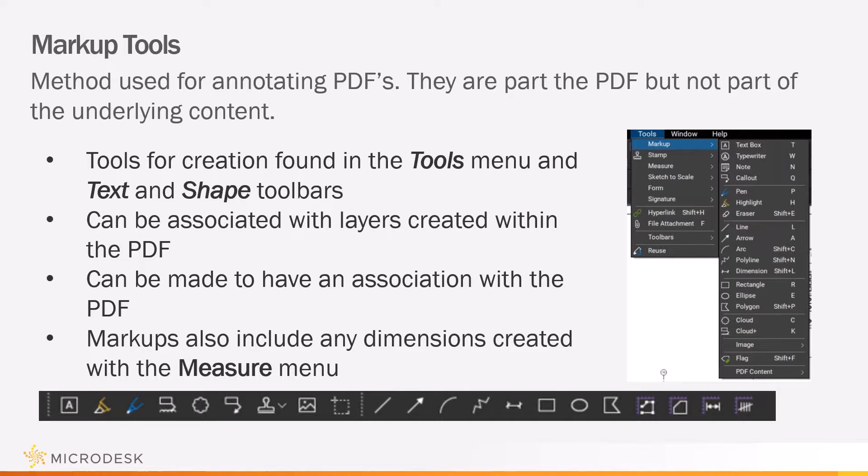Markups can be locked to protect them from editing in a couple of ways. One of those ways is the flattening tool. In Revu, flattening involves moving markups from the PDF's annotation layer to the content layer, in effect, making them part of the PDF. PDFs do not need to be opened when the flattening process is run, which is particularly useful when flattening markups on multiple PDFs.

If the PDF is open when the markups are flattened, a manual save is needed to complete the process. Whereas if the PDFs are closed and added through the Flatten Markups dialog box, the document is automatically saved upon completion.

Markup appearances and other aspects of them can be manipulated by working within the markup properties. These properties can be seen using toolbars such as the Properties toolbar, Appearance toolbar, Font, Line Style, or others. Those and other aspects of the markups can also be manipulated using the Properties panel. Here within the Properties panel, you will find a list of the properties that will be available to you in the Properties toolbar, but also much, much more that will help you with customization.

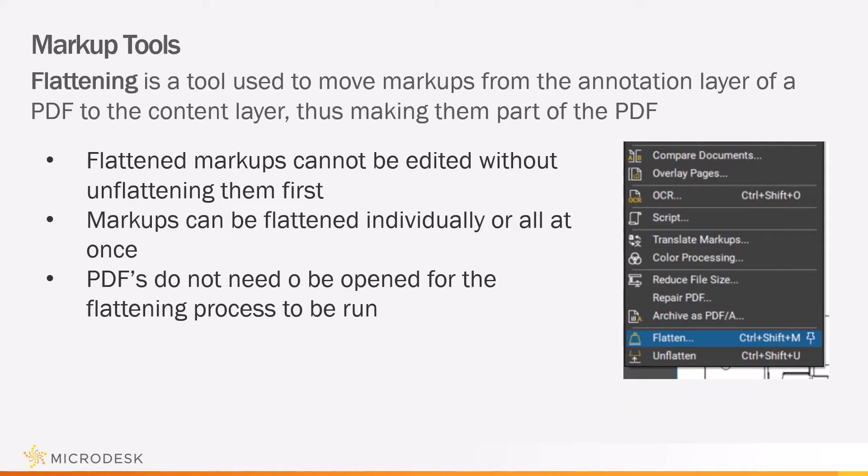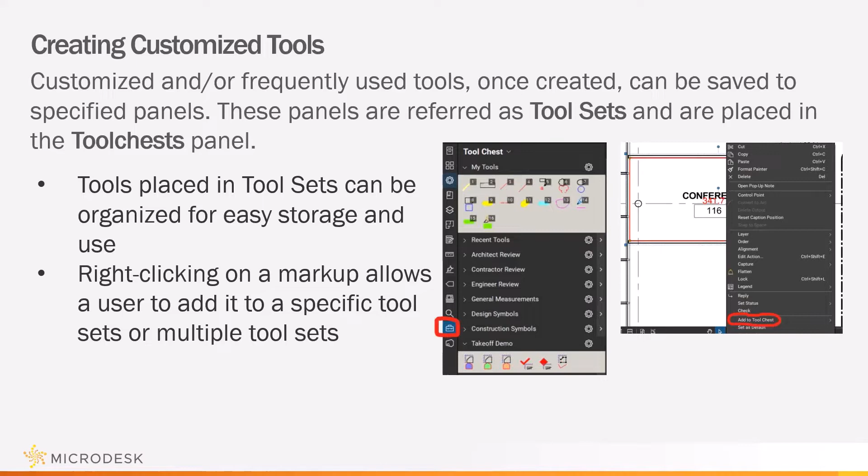When you customize tools, you're able to place them in the tool chest. The tool chest makes marking up documents much more efficient by storing and organizing frequently used markups for easy use and reuse. It automatically remembers recently used markups, can reapply a markup in its entirety or just using its properties, and automatically scale tools to fit different drawings without having to recreate the tool to match the drawing scale.

Once tool sets are created, they can be saved for a single user within their profile or saved out to a network location for use by many. Tool sets can be exported by selecting the gear icon next to the tool set name. Tool sets can be imported via the Manage Tool Sets option in the tool chest pull-down menu.

This will allow you to make this an enterprise level tool because one person can create the tool sets and place them in the tool chest and then save that out, and other users can then go to that network location and import that in, and then everybody within the organization or different departments within the organization will have access to the very same markups.

The tool chest makes marking up documents much more efficient by storing and organizing frequently used markups. Once the tool sets are used, legends can be created from them, which will allow us to place those legends onto the actual documents. So when the markups are there, people will have instant recognition of what those markups stand for.

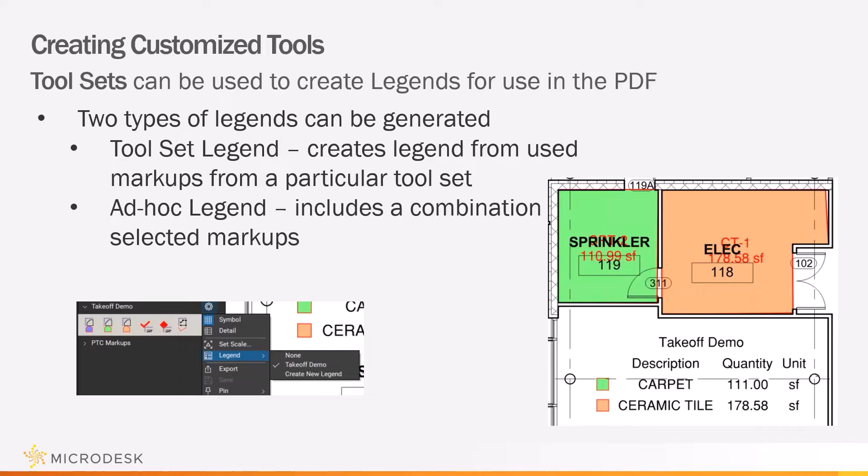Markup tools in the tool chest can also be displayed in different modes. Those two modes are properties mode and drawing mode. Right-clicking on the tool will display one of those modes. The properties mode adds new markup with the same appearance properties as the saved markup. In this mode, the properties are retained, but the exact dimensions, text, and so on are not.

In the example that you'll see as we go forward, using the tool properties would create a new box if we were creating the area. And it would create a box giving you the correct area of this new spot, but using the properties of the saved area calculation markup, which we'll demonstrate. The text inside of that box would represent the real-time value of the new area where that markup was placed.

Drawing mode adds a new markup that is the exact duplicate of the saved markup. It will be as if you copy and pasted the original markup rather than made a new one of a similar type. And what you will see when we demonstrate this is that when you right-click on the actual tool in the tool set, it'll allow you to toggle between the two.

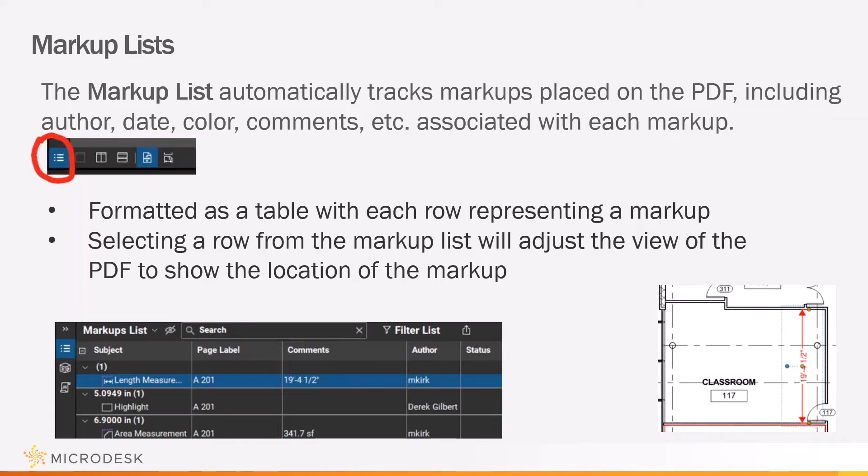The data displayed in the markups list is customizable. Users have control over which columns are shown and in what order, and create custom columns, including columns that perform user-defined calculations. 6 types of columns are supported, and you may add as many of each type as desired. And those choices for those columns are check marks, choices, dates, formulas, numbers, and text.

Once those markups are there, what one may want to do is send this markup list out for distribution to other stakeholders on the project, as well as internally to kind of show where things are within the project and within the status of the markups. This can be done with a markup summary.

And that markup summary is a way to publish a report of all the markups in the PDF file, including any embedded images. This summary can be sent to a printer, a CSV file, or an XML file that can be opened in Excel or other third-party programs, or appended to the end of a PDF. A summary differs from exporting markups because the data contained in the summary is formatted so that it can be read by other programs.

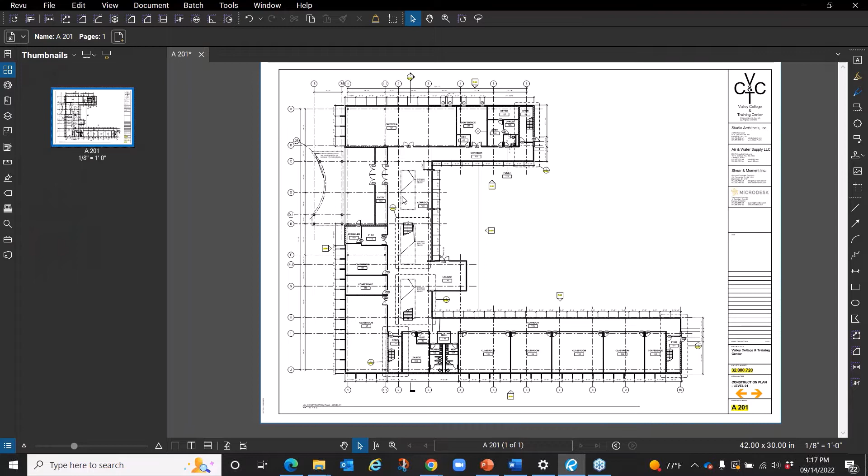So what you see here within our Bluebeam software is I have a sheet open, and one of the markups that you'll see that is set up here already is what's called, if I go to my tools, a hyperlink. So what the hyperlink tool will allow us to do is set up a sheet so that it will send us to a specific window in another drawing or another drawing as a whole, depending on how we set it up. So I can go to a hyperlink,

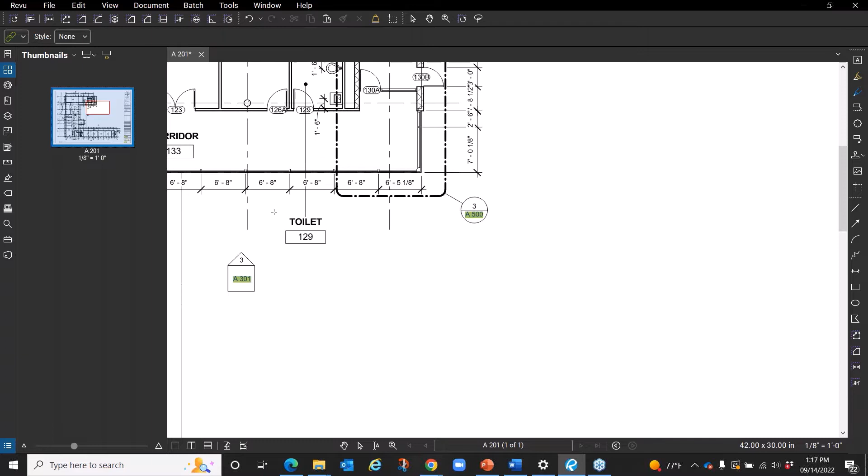and it's going to ask me to set up a window around where I want that hyperlink to place. And now it's asking me to jump to a page, a place. And if I say I want to jump to a place, then it will let me create that place. And I will get a rectangle here. And what I say is, when I click on this room, I want you to actually jump to this room area. And it gives me the coordinates, and I select OK.

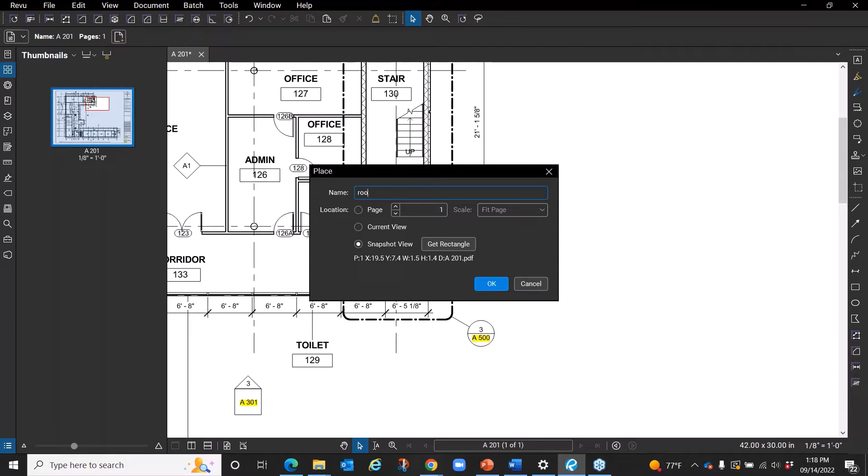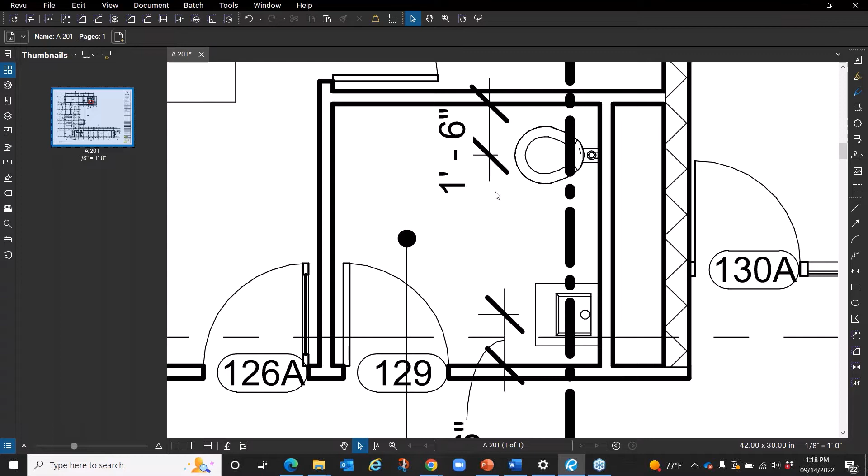And I give it the name, and I will call it room 129. And I select OK. That tells me what I have, and I select OK again, and then that's the snapshot that's there. And when I select it, you see that it automatically jumps me to that room. That is a form of a markup. Now, that form of a markup is done for navigational purposes.

But we also have markups here that can be done for notation. I can choose a markup that say, if there are red lines within this PDF that I need to keep up with, I can use a highlighter to say, I've done this markup. That becomes a markup. So whatever revisions needed to happen in that area, I'm just signifying that I've completed them. That could be that markup.

We also have markups where text boxes, if I want to say that in this area, I'm going to draw a text box. In this area, I wanted to say that this should be non-slip flooring in this area. And that becomes a text box for me. And adjust that text box.

And then now I can add arrows. And each one of these becomes its own markup. I'm going to create that markup and delete this one and delete the other one. Or I can create the markup where all that is linked together by choosing a callout. And then that becomes a consolidated markup. So these are all markups.

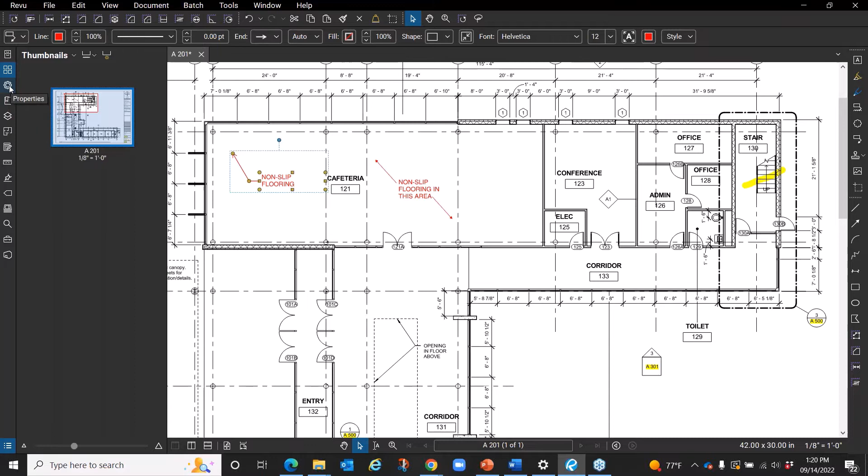If I select this markup, I can go over to my panels, and I have a properties panel here that gives me all the information about that particular markup. And I can change it. So if I want to select, come in here and then change that, this should be a different color. Come down to my font, and I want my font to be that same color. So I can change the color of that information within the markup by just selecting the markup and going over to the properties panel.

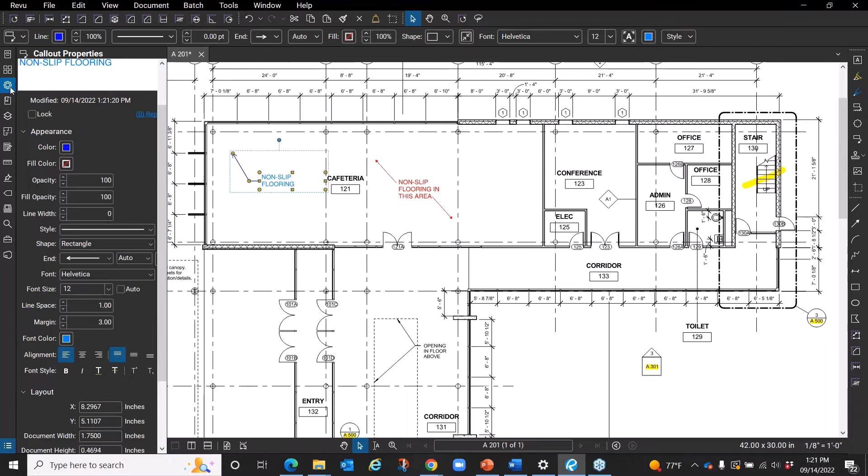Another set of markups that we don't really see here in these toolbars, because they have their own toolbars, are the measurement markups. You'll see those same things if I come to tools. I got my markup list here, but then if I go down a little bit further under tools, I have my measure tools, but they are still creating markups.

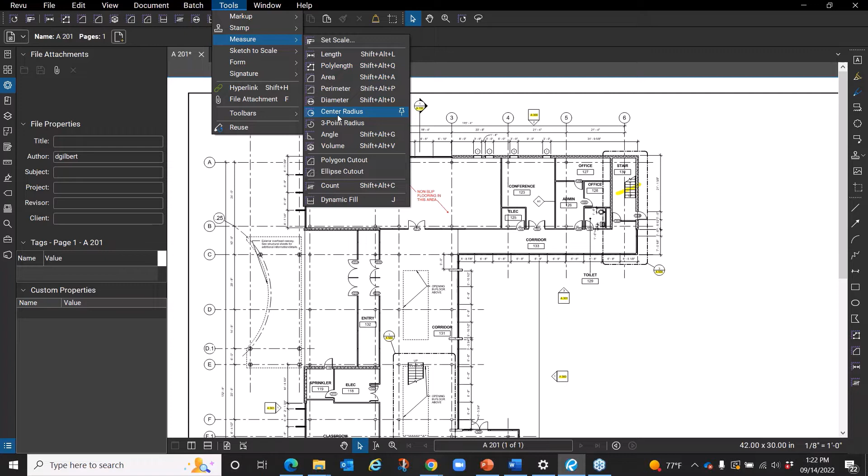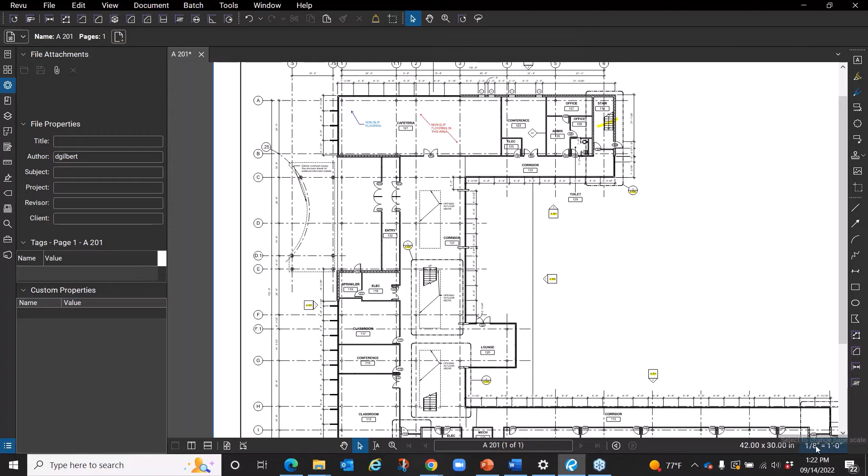If I wanted to create those, the one thing that I want to do before I begin creating any kind of dimensional markups is I want to make sure that there is a scale assigned to either the sheet as a whole or an area of that sheet. In this case, there is, but if there wasn't, this would say no scale set, and then I would left click on this field, and I can either set it by using one of my presets, or going through and calling it custom, in which I can calibrate that scale.

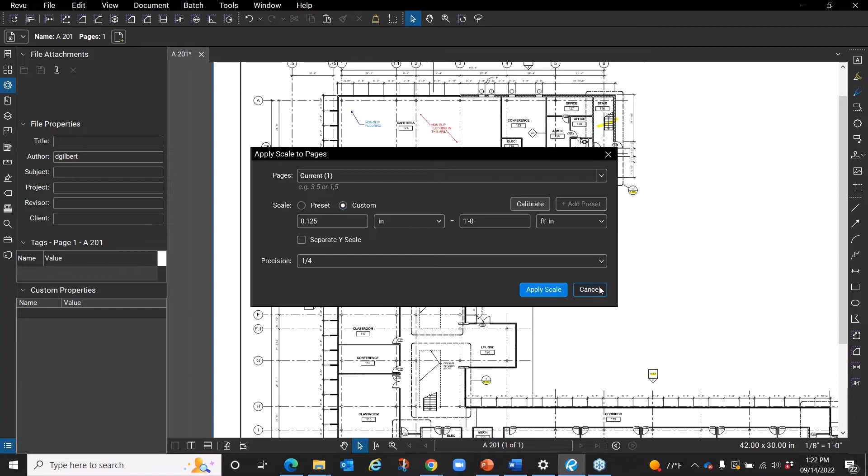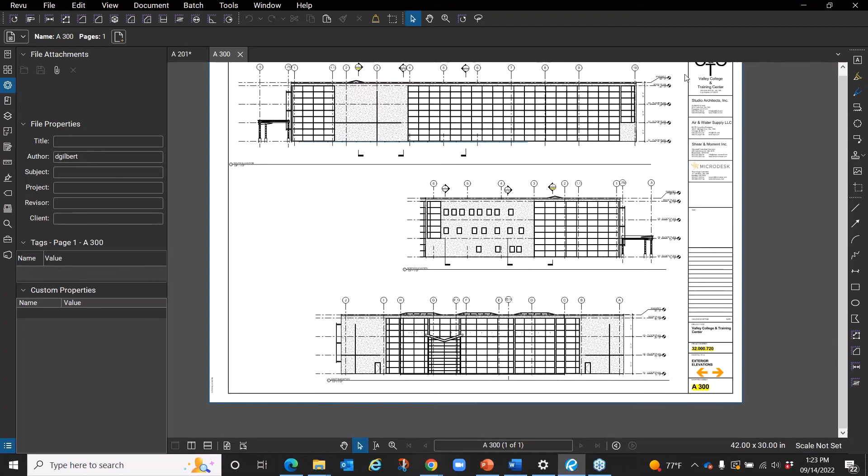If I have a dimension here that this is 12 feet. So let's say this is not set and I want to set it. I'm going to left click on it. This is where it says scale not set. I'm going to call it custom so I can calibrate. And it's asking me to pick 2 points. I pick those 2 points and I tell it that's the dimension that it is. Recalibrate.

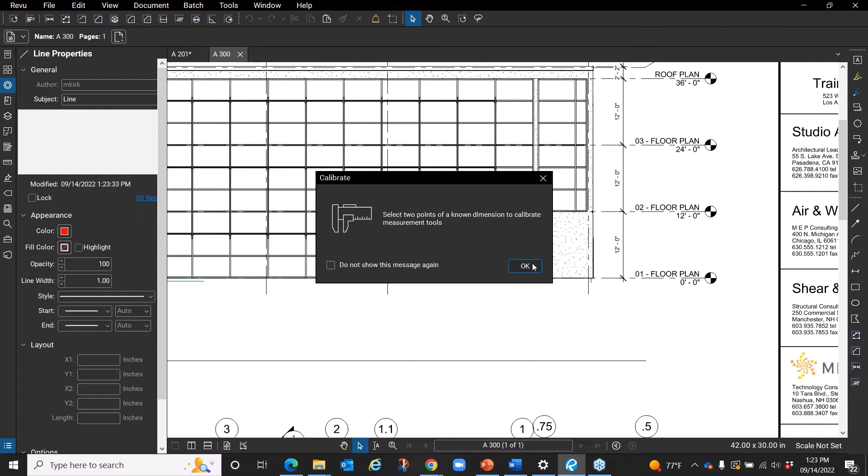And it tells me that this dimension is 12 feet. The 2 points that I picked should equal 12 feet based on that. And I apply the scale. Now I can do a markup. And my markup that I'm going to choose is my length markup. And I'm just going to pick 2 points. And you see that's calibrated and that's set up, giving me the right dimension.

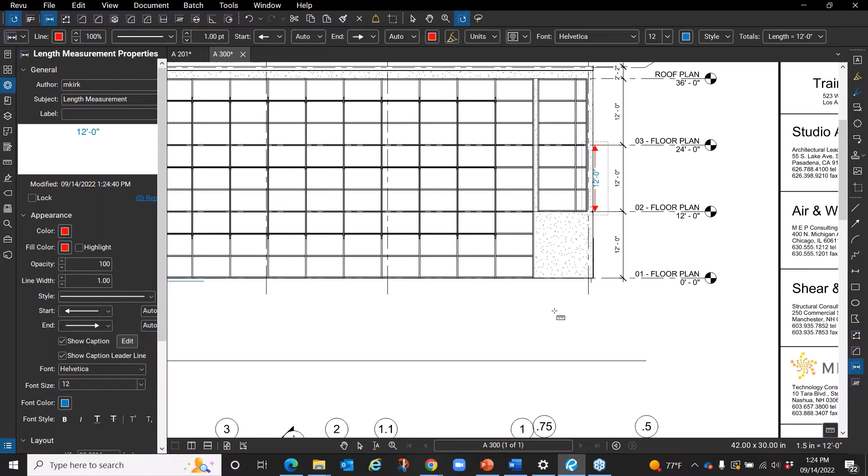In my properties palette, there are my dimensions. That's my dimension. Here are the properties of that dimension. And then I can go through and change any of the properties that I want within that particular markup. So that's how specific we can get with that, with the properties of it.

Now, each of these tools that we've created, if I want to reuse them, then I would want to take the tool, the markup, and place it on a tool chest. What you're looking at here is the default tool chest, or most of these are default within Bluebeam. All depending on what profile you choose is going to be what tool sets you get by default, but you can feel free to add your own.

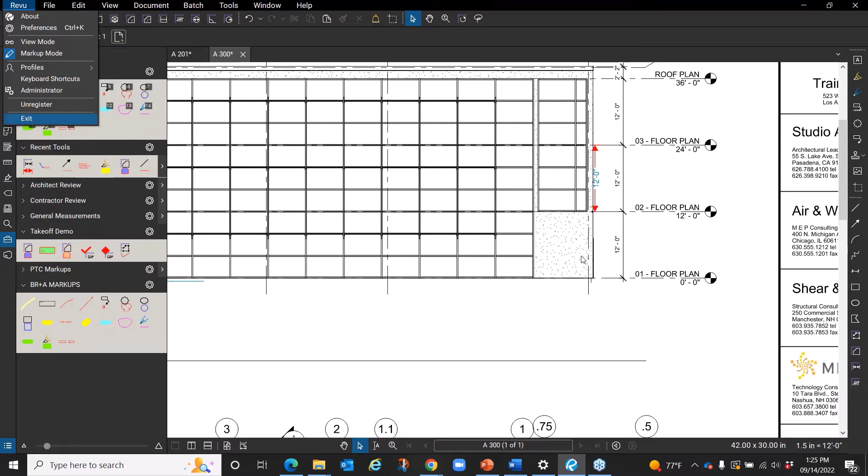I'm going to go back to the floor plan here, because if what I wanted to do is use one of the tools that I have here and place it on the tool set, I can left click on it and then right click to get to the properties and add it to a tool chest. And it gives me a list of what tool chest do I want to add it to. And I'm just going to add it to my tools, and you see it appears there as the 18th tool on that tool chest. If I want to use it again, then I just left click here, and there's my markup.

The other thing with the markups is that if we were going back to the measurement tool, and what I wanted to do was take an area based off of what we've already done before, and I place the tool in the tool chest. If I right click on this, it says drawing mode. And as I mentioned before, drawing mode is an exact copy of the tool. What this toggle does, if I toggle, this is showing me what it isn't. So the fact that it's showing me I can toggle to drawing mode is letting me know that this particular tool is in properties mode already.

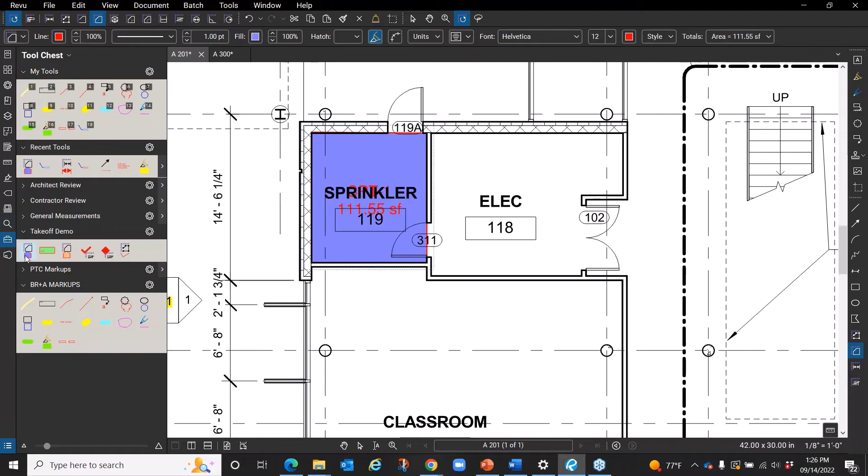So if I want to use it, I just left click on it. It takes me to the area tool, and I'm just going to select the area here, snapping to those points. Hit enter. It's carrying the same properties as this tool was, but acclimating itself to the actual space that I wanted to calculate the area for. Same thing would apply if I did it here. The room is a little differently shaped, snapping to my corners, hit enter, same thing applies.

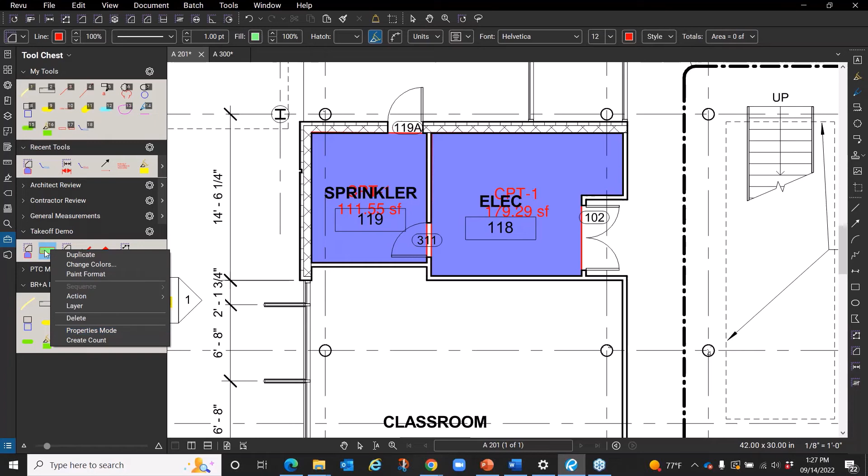Now, if I go to the markup next to it and right click on it, you see it's telling me I can toggle the properties mode because it is currently in drawing mode. So if I use this tool, you'll see what it gives me, the exact shape of the first time that this tool was placed onto the tool chest. So that's the difference between properties mode and drawing mode when it comes to creating your tool chest, your tool set objects that have to do with measuring tools.

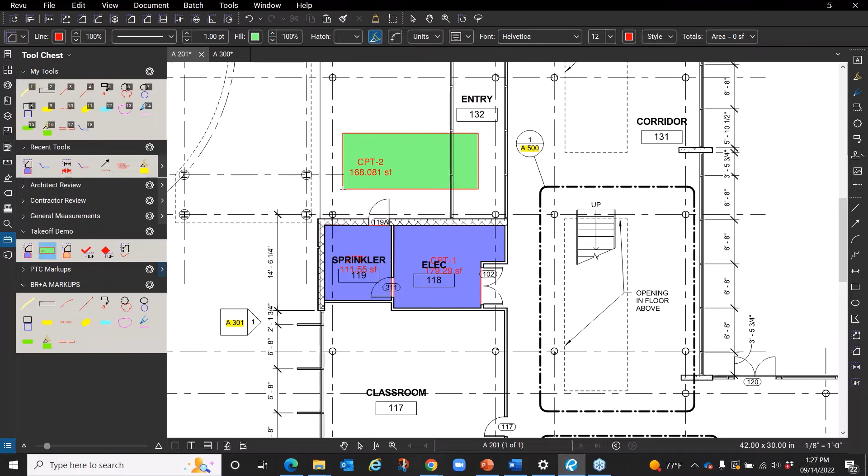But once all of these are done, and I place these on my tool chest, within my tool chest, I can then say, well, I need to create a legend based off of the tool set markups that I've used so far. So I'll create a new legend, and these are the markups that we've used within this so far.

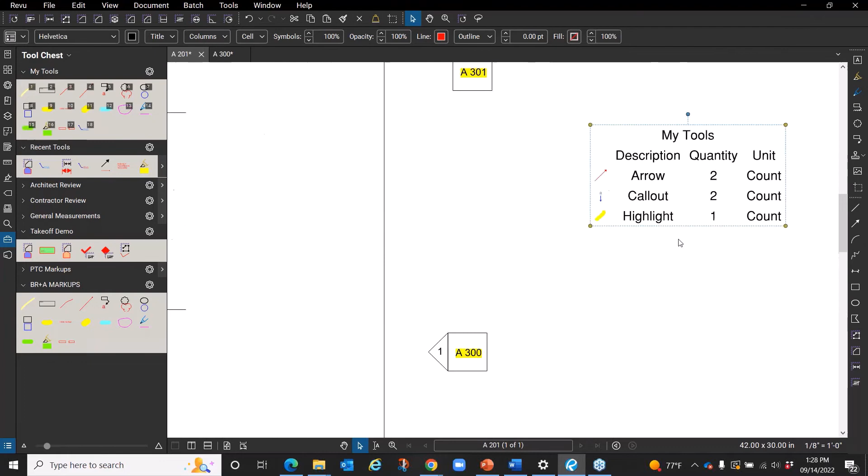If I did the same thing here, create a markup based off of this takeoff menu and create a legend, then it shows me the carpeting that I just placed in. Those are some of the easy ways that you can take advantage of the markup tools and how easy they are to implement within your organization. I have my toolbars. I have my pull-down menus to gain access to those markups. And I have places to keep them and standardize them once I begin the usage.

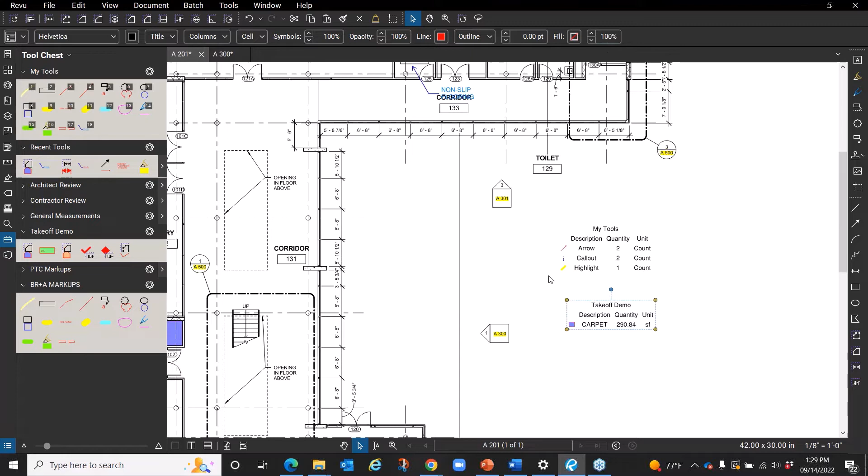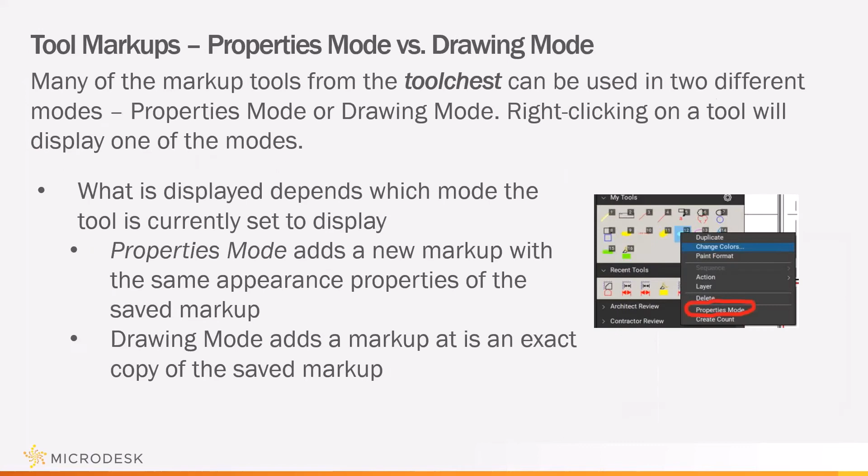So with that, I'm going to jump back into the PowerPoint slide, and if anyone has any questions, we can look at them. So we have a question that I think is referring to the downloading of tool sets for your tool chest, and those are going to be available to you from Bluebeam support.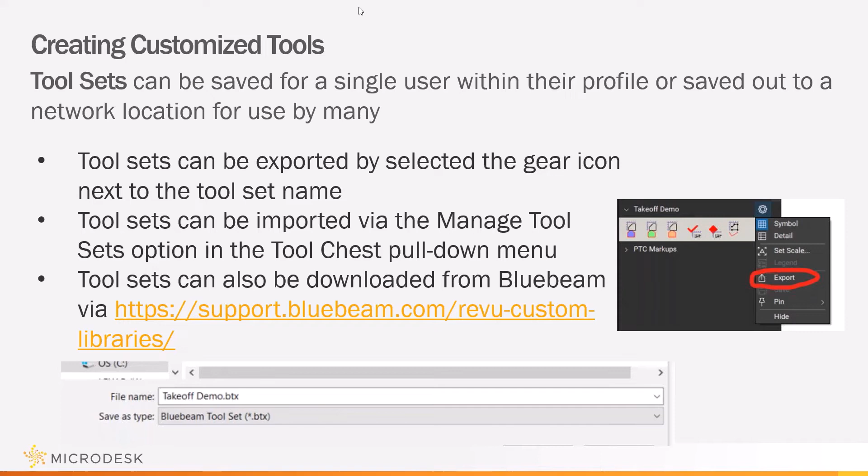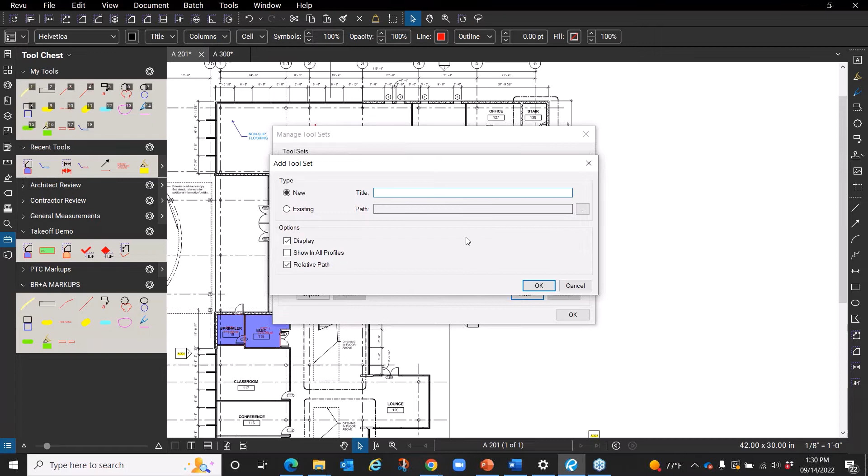So we have another question. How do you create and name a new tool set? I'm going to end this slideshow and go back into Bluebeam to show you that. So what I can do is I can go up to the tool chest title and choose Manage Tool Sets. This will allow me to add a new tool set, but also control what tool sets are currently available to me. Which of those do I want to see? So if I want to add a new one, I can just click add here, give it a new name, and then it'll create a tool set that I can then populate with items.

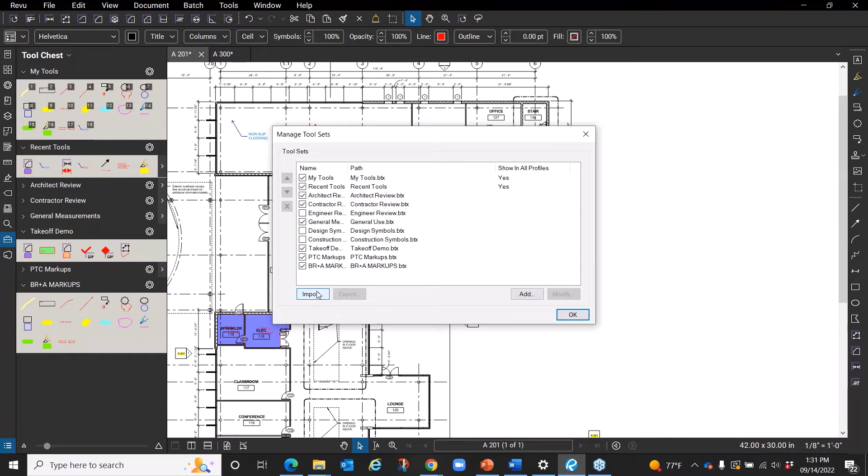Or, as I mentioned before, we can take this to a bit of a higher organizational level, where someone can create the tool set and then save that tool set, export that tool set out. I'm going to cancel here just to jump back into it for a second, but take the tool set and export it out. And then when I come back to manage tool sets, I can import it in if someone created it, and this is something that we want to use on an organizational level.

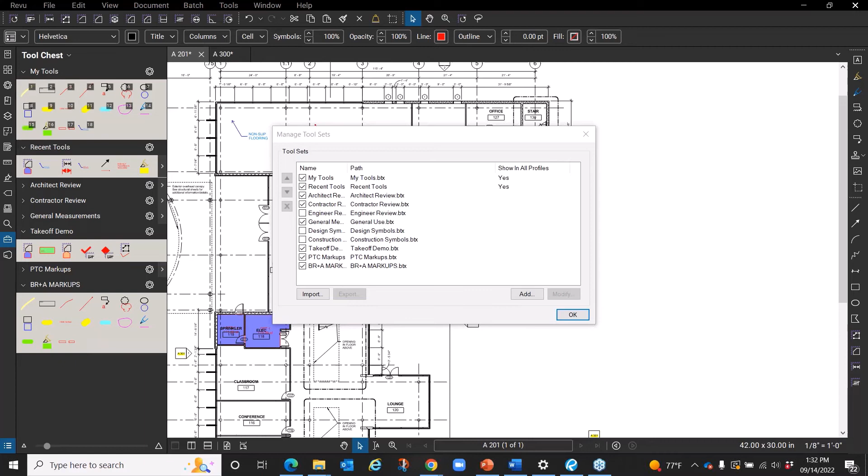So here we have a question of, can you have two different scales on a single sheet? Yes, you can. And this is how you can do it. I'm going to hit OK here to get out of this. I'm going to open up another sheet. Because let's say we have a situation where I have details. Let's see if this is good. Right. Okay. So here we have 1 inch equals a foot and 1/4 inch equals a foot.

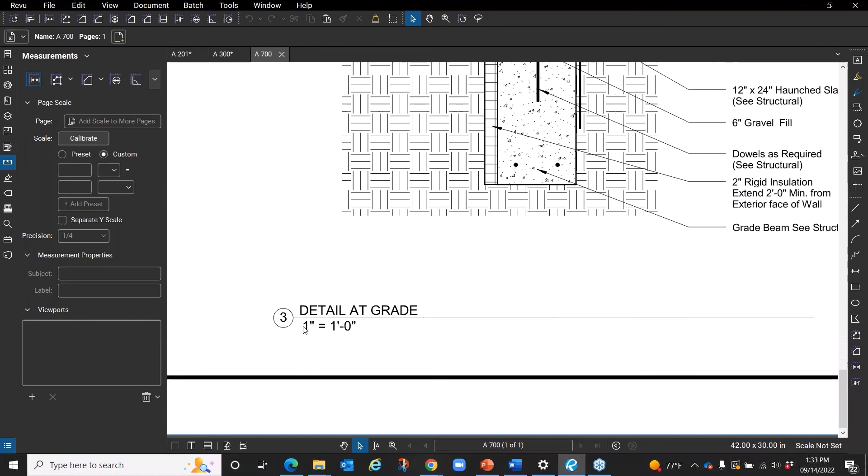And if my intent is to create markups in both of those areas, what I can do is under my measure panel, I can set the scale of two different areas by creating viewports. I'm going to call this viewport just the detail name, detail at grade and roof detail. So I hit the plus sign here. And again, reiterating, go to my measurements panel, down to the viewports, click to add a viewport. I select the region to define the viewport with the window, give the viewport a name.

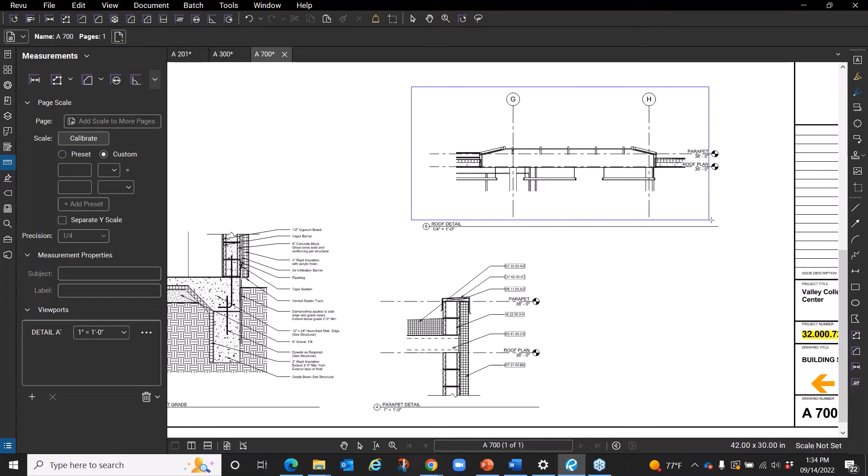It's preset, it's 1 inch equals a foot. What's the precision of the dimensions that I'm going to put in this area? I'm going to say it's 1/8 of an inch. And I can hit apply. That's one viewport. And you see it has the scale noted here. I'm going to go to another area and do the same thing. Create it. Select the two points that are going to serve as the region. Call this roof detail.

That one was set at 1/4 inch. I'm going to leave that. Same thing applies. I'm going to make this precision at 1/8 of an inch. Hit apply. And now you see we have two different areas. So we can assign viewports. We just have to block off the area where the viewport is going to be shown. And then we can assign two different scales.

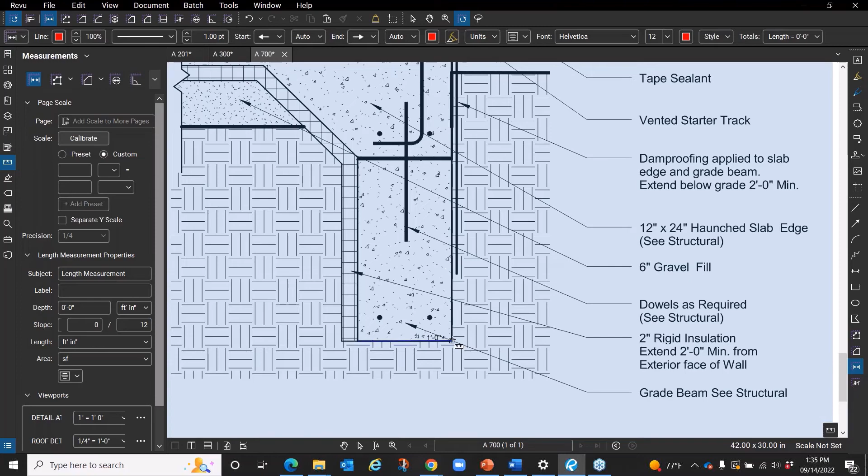So now whenever I go in and I do the length tool, I know that this is the right dimension based on that scale of that region. And when I come back up and do the length tool here, I know that's the right scale for that region.

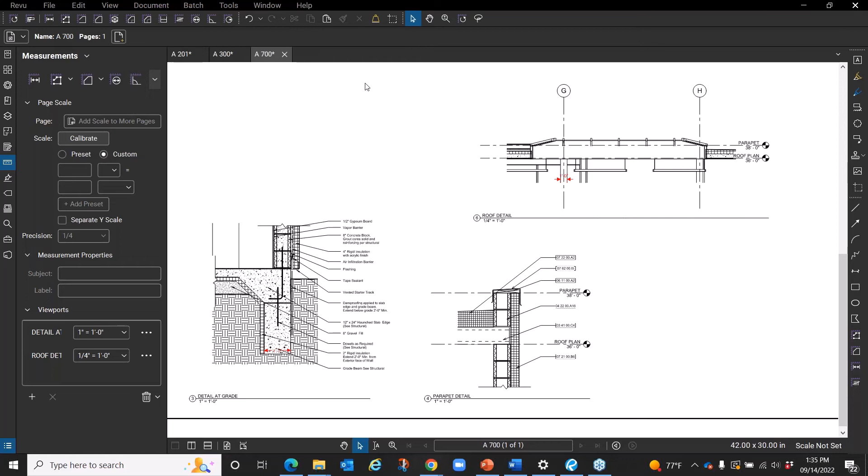So our question is, how do we export organized markups? So if I go to my markups list, and we have a list of our markups here, I can export a summary. And I just choose, in this case, because you want to open it in Excel, the CSV file.

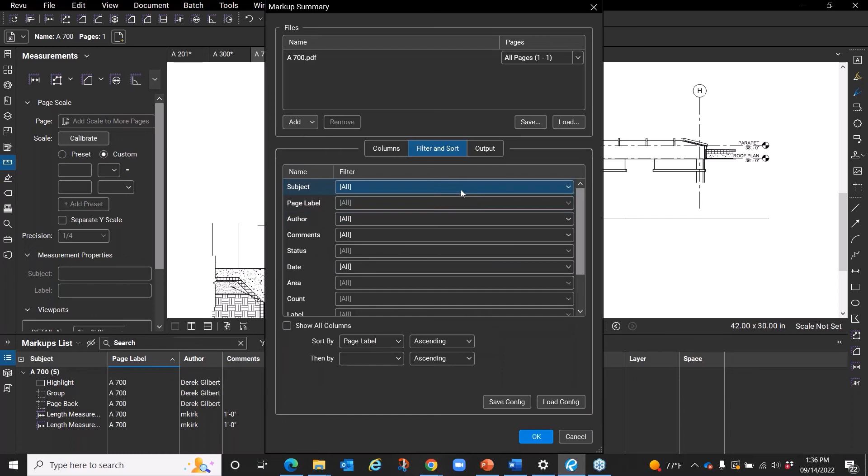It could be based off of a single PDF, as I have here, or if I had a multi-sheet PDF, I can just tell it to give me all of the markups off of all of the sheets in that multi-sheet PDF. And then what do I want? What columns do I want to be part of that summary? Is there any filtering and sorting that I want to do based on that? And then here's the output. Where is that output going to go?

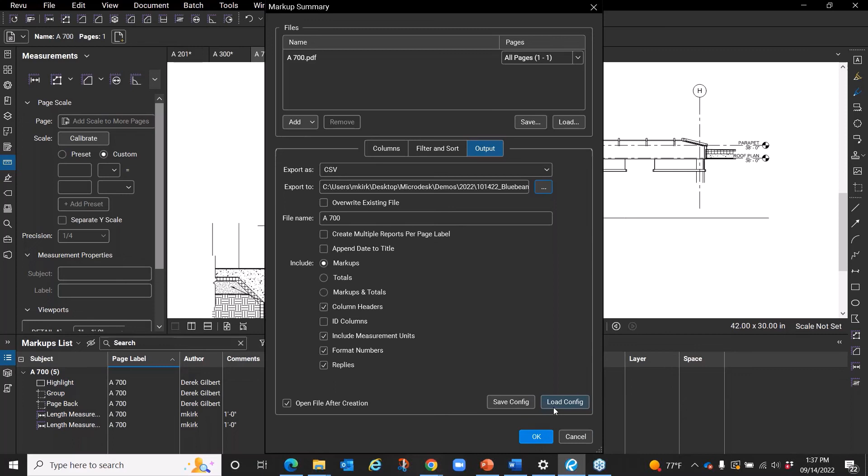Then I can just tell that output that I need it to go here. And so select that folder. That's where that CSV file with the markup list is going to go. And then if I want to save this for usage later, sure. If I have one saved, I can load it. I select OK. And that's the organized list. So it's just the decision of what format you want that markup list.

So deleting items from the markup list can happen if your intent is to delete the markup. Deleting the markup will delete it from the markup list. If you just don't want to see it on the markup list for a particular purpose, then I would suggest using the filter, because then you can go through and select. Like for dates, I can say I only want to filter it by what's been done in the last couple days. That will filter down my list, but not get rid of the markups and not get rid of the item from the markup list. It will just control what I'm seeing.

But if your intent is to delete the markup from the markup list and you're okay with deleting the markup also, then just select it and delete.

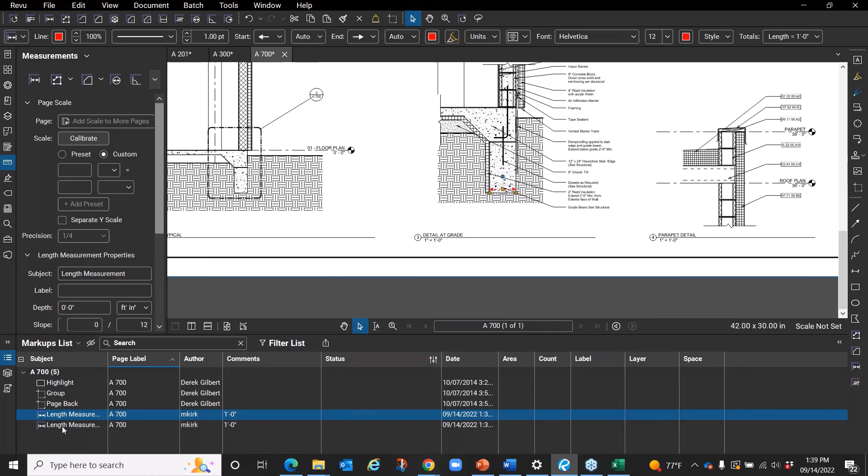And yes, when you are looking at your markup list, I'm going to unfilter. When you are looking at your markup list, when you select it, it's going to take you right to where that markup is. If it was a multi-sheet PDF, anywhere that you pick on that list is going to take you right to that sheet where that markup exists.

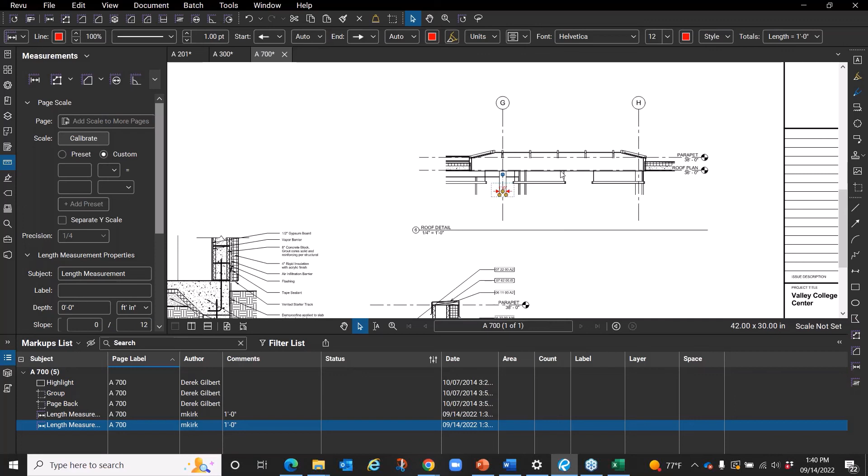Yes. So the markups that you're doing: whoever created the markup is always going to be listed as the author. But whoever actually does the revision, or whatever needs to be done associated with that markup, can change the status of it. And then once you change the status, like if I say this is completed, I become the person who marked it off.

So it's my status based on me being in Bluebeam, particularly if we're working in a collaborative way using Bluebeam Studio. Then multiple people have access to the PDFs, and whoever is doing the markups will just change the status, and that status will mark the person who actually dealt with the markup.